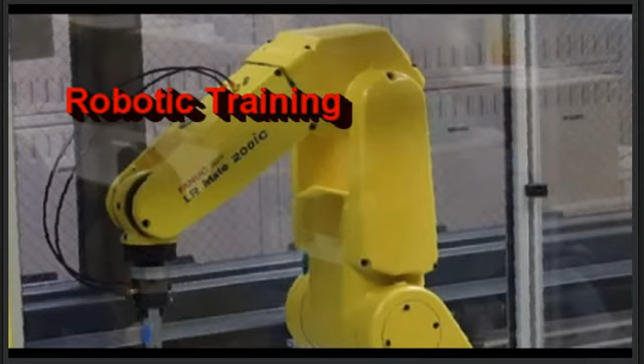What our units look like. You can see that we've got an arm, so we have a robotic arm. We have the controller back behind here, and then we have the teach pendant. Those are the three main parts of this robot. So

let's go on. Here's the teach pendant, and there's a number of keys on here. You can see that I've got an on-off switch over here. We've got an E-stop. Of course, that's going to kill everything if I hit it. So if you think you're running your program or whatever, and it looks like it's going to crash, and you're starting to get a little bit nervous, you can always just hit the E-stop and it'll kill it as well.

And then you've got a number of push buttons down here. The big ones that we're going to use most often would probably be the shift key, the reset, well, just the one that got listed, the coordinate key, our jog keys, and if we play with the speed, we can use these two as well to adjust our speed. Those are the ones that we're going to use most often. And I will give you the opportunity in lab today to even try that if you want.

Okay. Our robots are 6-axis robots, meaning that they actually have 6 different joints. You see the joint 1 is right down here by the base of it. Be right here, 2, 3, 4, 5, and then 6 is out here. Okay.

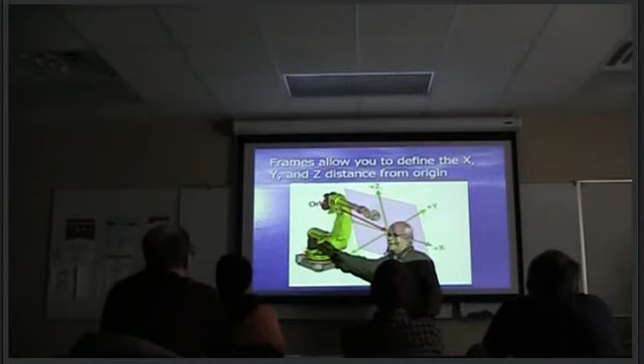Okay, so here, you can see that we got our X, Y, and Z, but notice the origin has changed. It is no longer over here on the base where we saw it before. It has actually been extended out. Okay, so our X, Y, and Z start at this point. So our frame, which would have been over here before, has now been extended out further.

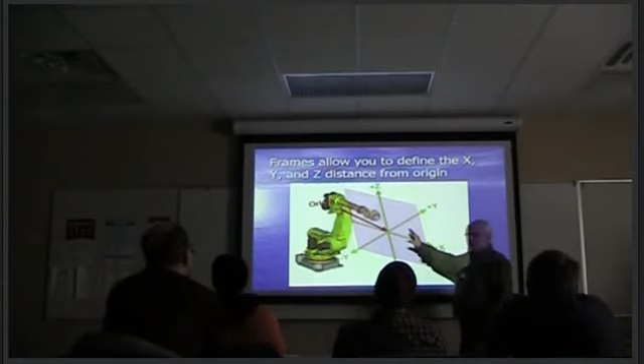You do that by manipulating what your coordinates are. You can actually set the coordinates. So we can say we want to go out so many centimeters out away from the base. That can be our origin. So you're orienting on what you're working with? Yep. More or less.

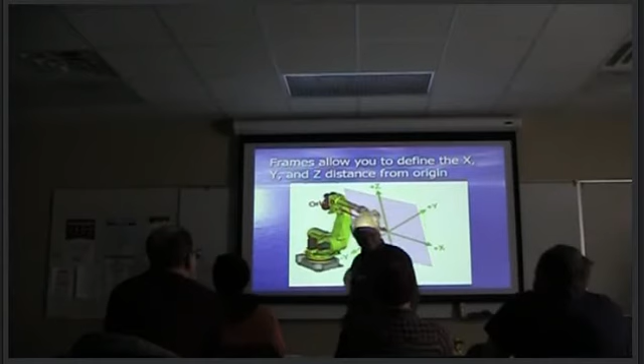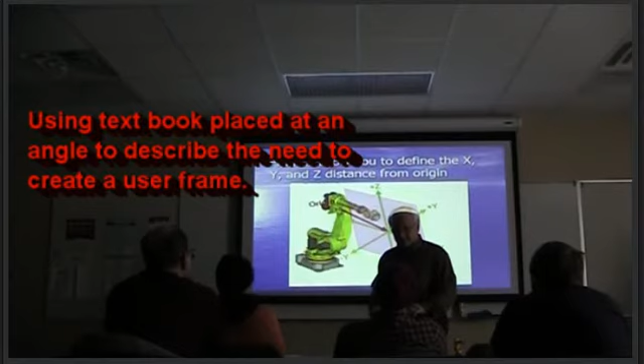Say I was going to build a piece of equipment or set a piece of equipment in place, and I'm using my robot to do some welding. Well, what happens if it's sitting like this? If my robot only knows X, Y, and Z, it'd be pretty hard to weld on this at an angle. So we actually go to what's called a user frame, and we would set this up as our origin. We'd have our X, Y, and Z figured out for that. So that's what a frame is.

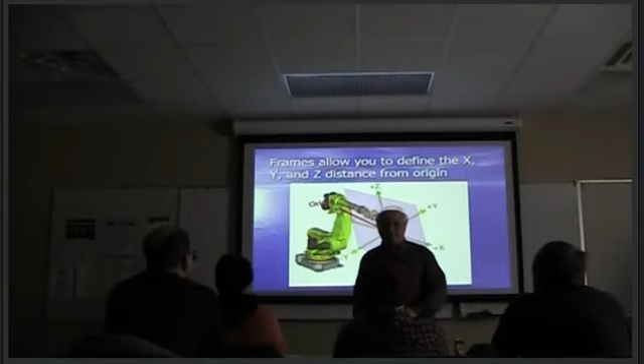And they actually have different ones that they use. They've got world frame, that's the default one. That's the one that uses the base or the center of the robotic arm as their origin point. And then you've got tool frames, and again, that's going to determine where your tool is actually going to be used. Like when I tip the book up, we would use that for our user frame origin point. Then you've got user frames.

Remote tool center point, that is if we actually had like a welding rod or something on this. So when we go to tool frame, we're talking about this piece right here, the center of this. If we have something that extends out from that, that'd be your remote tool center point. So if it extends out, we would go off that. So there's a lot of different choices we can use.

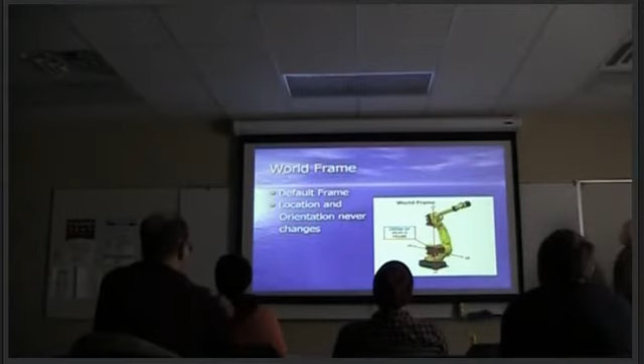And I just mentioned this about the tool frame. If we use that, it's the default of the base plate where we mount our tools on there, on the arm. And if we look at it again, you can see that if I do actually have a tool that extends out past that base plate, then it would be a tool center point that we'd actually be using for origin.

Okay, now, what we're going to do, and actually I brought in one of the teach pendants with me. When we go into the lab, I'm going to actually have you have the opportunity to move the robot a little bit. We use the teach pendant for that. And you look at your X, Y, Z. These are the three major axes. Okay, that's your right-hand rule.

Okay. The orientation or the minor axes are out here, where we have what's called yaw. This is pitch, and then right here at the end of that, roll. So those are your three minor axes. Any questions at all? Does that make sense?

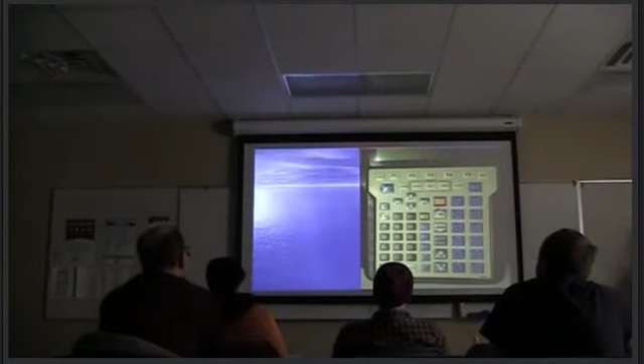Okay, so to open a file, we would actually first select, arrow to it, and so on. We'll get back to that, I think. I'll go through this a little bit with you. Okay. So if you look at that, and I think you can still see it up there, I'm not sure, but if not, I'll bring up our teach pendant here, and you can see that I do have a select button right here. Can you see it on that? Does it still exist on that? Okay. So we still have a select button.

So if you push the select button, you're going to get this window to pop up, or the screen will change to this. And what this does is it lists all the programs that have been stored in the memory of this arm. The one that's highlighted is the one that I created. We use the letters ZZ when we're creating our name for our program. The reason for that is at the end of the semester, it's easy to go in and get rid of the Z's.

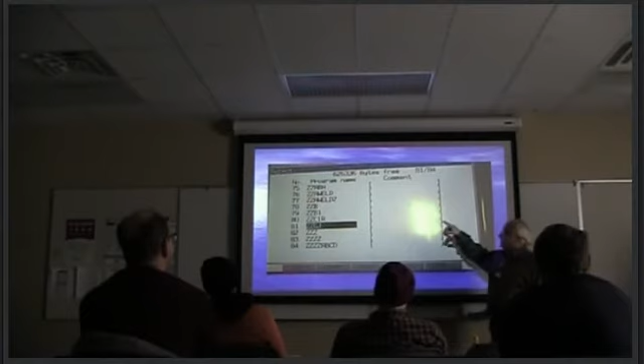So rather than have this thing get so full of programs that nobody can use it anymore, and how do you determine which ones to get rid of? We've already got them tagged as Z, so we know that those are ones we can get rid of. That's just here. You're not going to find that every place you go, obviously, but at least here we know which ones are which. So anyway, you would arrow down or up to whatever one you wanted. You can see that mine just happened to be 81 of 84, right here.

F2 to create, we're going to do this today as well. So we're actually going to go in, we're going to move the robot arm around. I'll show you how to do that, and then we'll actually go and set points inside the work cell so you can see what's going on with that. Okay, you can see here that I've got this picture because you can see my finger pressing F2, which corresponds to create.

So if you go in there and you want to start with a whole new program, in other words, you don't want to use somebody else's, or you've got one in there already, then you can enter that one. But in this case, you want to create a new one, you just push F2 for create.

Okay. And you can see them along the bottom there. These are your actual choices. So when we hit select key, this pops up, and these are the different choices that you can make. And even if you want to go out and delete your program, if you have a program in there to delete.

Yeah. When we do go in there and we do click create, you got to create a name. You got to put that in there. And how we do that is this Alpha Input 1. And even though you can't read it, it says uppercase.

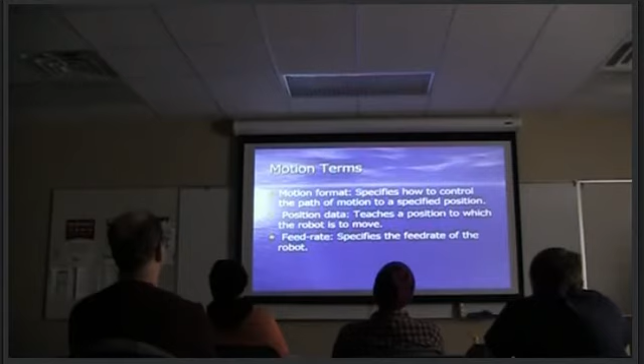And they are like motion format here specifies how to control the path of motion to a specified position. Position data teaches the position to which the robot is to move. Now, this works with the frames. Again, which frame are we using? Do you remember? World. So we will be putting these in the world mode. It also determines the feed rate, how fast we want this thing to move. That's what a motion instruction looks like.

So these are the things that we need. We need to tell it what format. We need to determine the position data. Now, they've got two choices. You could either move to a point and then set that point. That's what we're going to do. Or you could have a position register. In other words, a register that you created where you already got a position picked out. You just call it that register. And then you go to that.

Yes? Which motion command are you using? Motion commands are joint, linear, and circular. That's what the JLC stands for. No, which one will we be using? Which one will we be using? Yeah. We'll just use the joint. It moves faster than linear, and circular requires 3 points for each part of an arc. You gotta have the start, you gotta have the top of the arc, and then where you want to go to.

Okay, so the next one over is your feed rate. We will determine how fast we want to go at it. It's at a percentage, so 50%, 100%, whatever we decide there. Then it talks about position data. You can see that it's got X, Y, Z, W, P, R. What are all those? Are the points, or the location of your different joints in the robot.

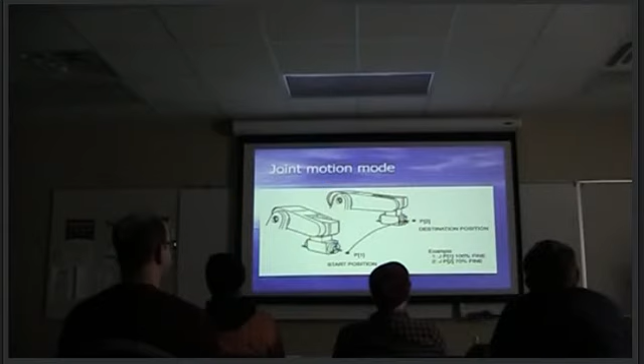We'll talk about fine and continuous, so kind of keep in mind that I did say fine at this point. Fine means it's going to go from one point to the next point without skipping or just going around the point. When we go to continuous, that does change. Okay. Linear motion. Speed must be chosen from millimeters per second, centimeters per minute, and inches per minute. In other words, we have to choose the speed.

Attitude of the tool being moved is controlled by the attitude at a start point and the attitude at a target point. In other words, it's going to keep it tight. Think of welding. If I'm welding something, I don't want the point going up and down. I want to keep it right where I want it as it moves. With the other one, it wouldn't do that. Circular is going to kind of go around and the point will go up and come back down slightly as it does that. So that's what they're talking about there.

There's different speeds. Is that the same one? I gotta get it twice, I guess.

That's slower than the joint mode. It has to take a little more time to get where it needs to go. Probably has to manipulate all three joints or more while it's doing it. Well, it could be manipulating all 6. Yeah.

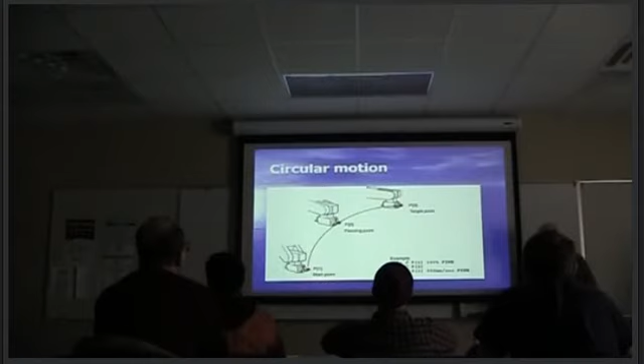Okay, remember I mentioned fine? Here's where fine and continuous come into play. If it's a fine position path, robots stop at a point before moving to the next point. And you can see here the instruction. If it's continuous, it doesn't necessarily stop exactly at the point. It's going to get close to it and then go to the next point.

In other words, say you want to outline this book. So this is point 1, this is point 2, 3, 4, and we put a 5 in there just to get back where it's supposed to be. As our robot comes here and it gets closer, depending on what I want that continuous to be, it could skip all the points as it goes around until its final point. It's going to come close to it, but it isn't necessarily going to come here and stop at it. And again, that speeds up the process if you don't need it to be exact. So that's what they're talking about, continuous.

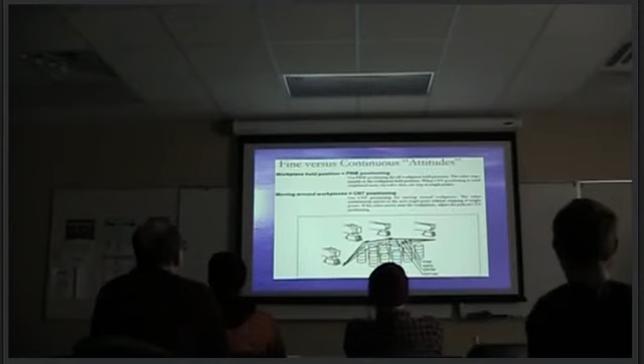Right. So 100 is your largest discrepancy, whereas 0 would be your closest to fine. Here they show another example of it. You can see that they're going from point 1 to point 3, and you can see how fine is right to the point, and of course the other ones vary further out as you increase that number.

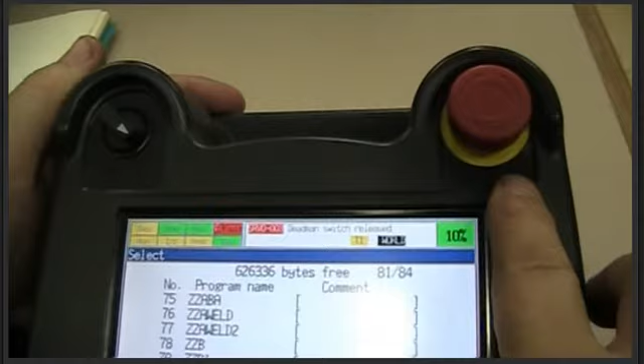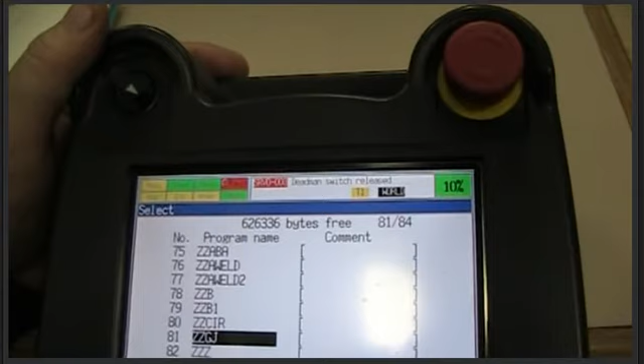Okay, here is the teach pendant screen. If you look up here, you can see that I've got the selector switch in the on position. I also have my e-stop out. You will notice that it says fault up here. At this point, it doesn't matter during this process of creating the points. Once I try to move the robot, obviously I have to get rid of the faults.

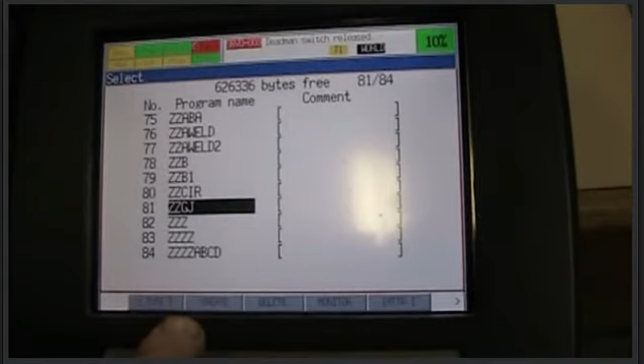But the first thing I want you to see is right here, that gray bar I was talking about, and it is split into 5 choices, and the one we are concerned with is the one that says create. They correspond to the F keys that are located down here. So create corresponds to F2, so I'm going to push that.

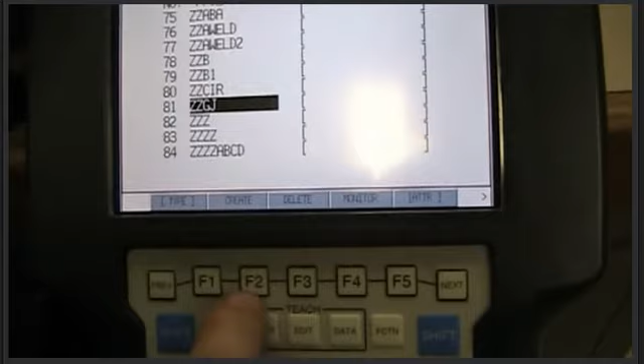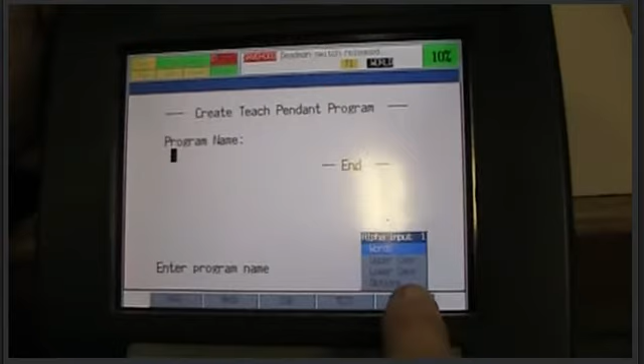Okay, here is your create teach pendant program, and now it's waiting for me to create the program name. If you look at this little window that popped up over here, this is what I was talking about as far as the alpha input, and you can see the first one that's highlighted says words.

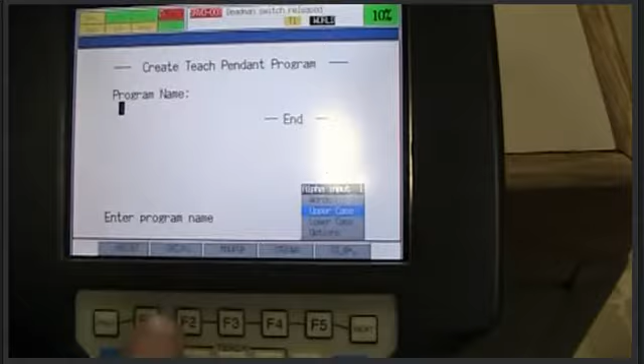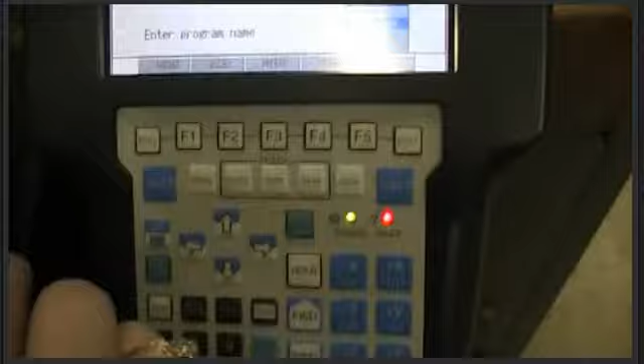I'm going to arrow down, so I'm going to go down to my screen here, arrow down, and you can see now it's switched to uppercase. And now if you look at that gray bar, you can see that the corresponding F keys correspond to a group of letters. Again, for here at our school, we always start with Z's.

So there's the first Z, you arrow over. And I'm going to put another one in there, arrow over. I'm going to put a third one in there just so that it isn't going to be confused with another program that I've got in there. And now I'm going to put my initials in there.

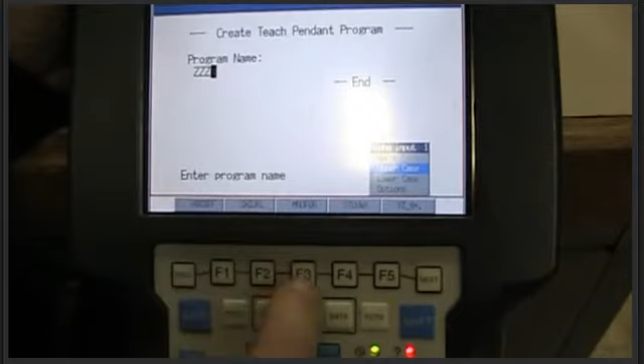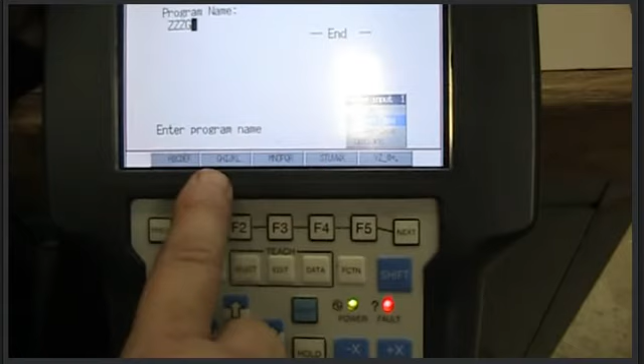My first letter would be a G. There's my G. And again, you have to arrow over each time. Otherwise, it doesn't move. You'd just be writing over the top of what you've already created. And then my last initial starts with a J. So I've got my J in there. So now I've got triple Z, G, J. And I'm going to push the Enter key.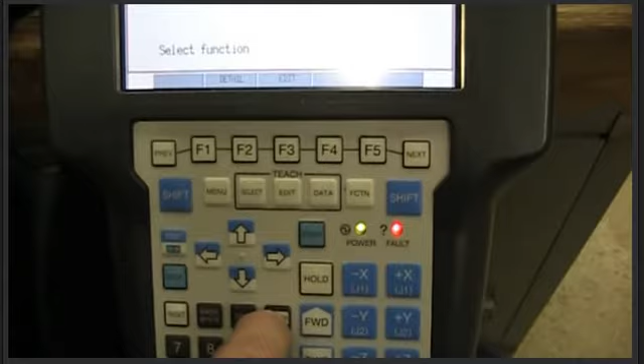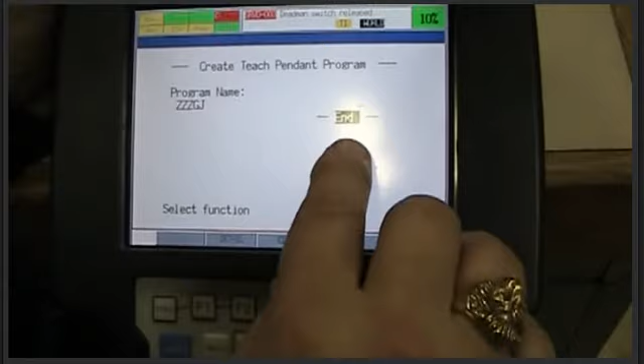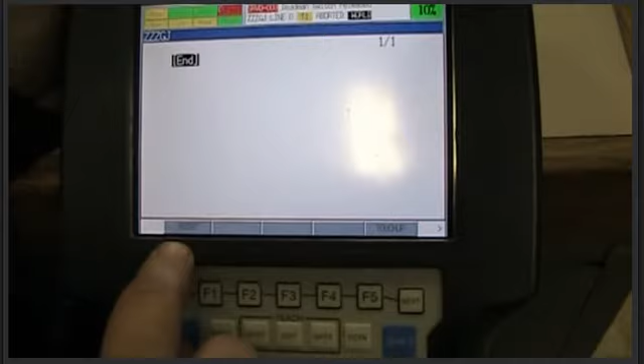Okay, if you can see that it changed, that window disappeared. It says create teach pendant program. There's the program name I created. Now it says that the end is highlighted, and this is where you hit enter. Okay, you can see that it now says end here, and it says point. The other one that I couldn't remember before just says touch up. We're only concerned with the point right now. So I'm going to push F1 to correspond with point.

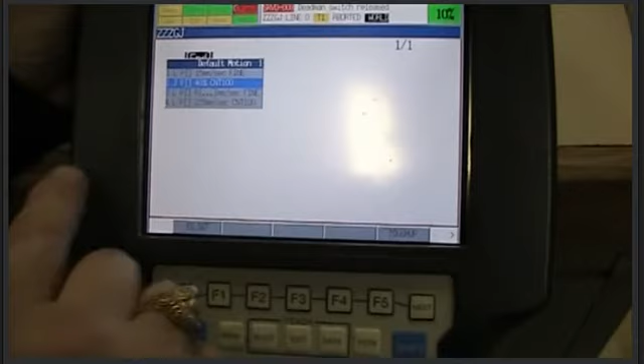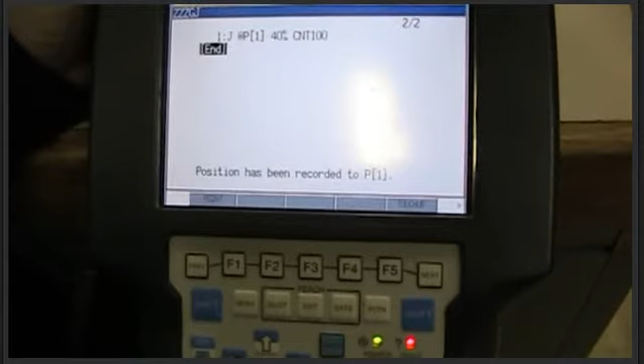And here's the default motion window I said that pops up. And you can see I've already got the second one highlighted. And that's where I wrote down JP with brackets 40% and continuous 100. So I'm going to hit enter. Okay, so that would be my first point. And that would be where you would have your robot positioned.

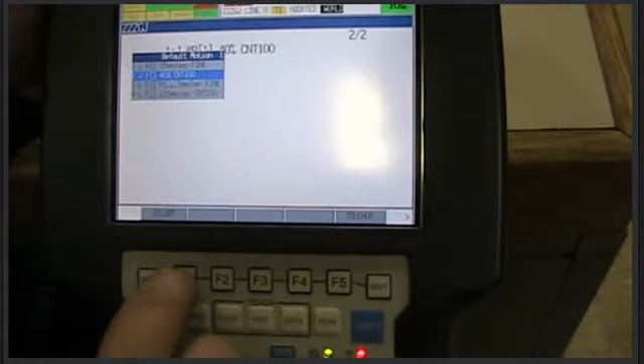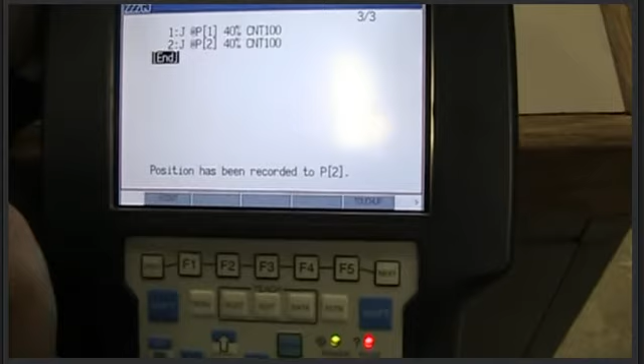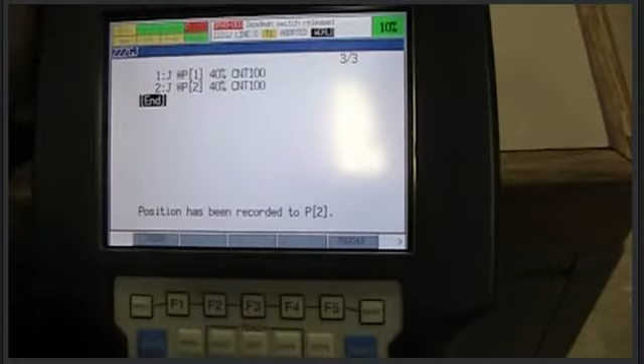So now, each time I move the robot to a new position, I hit point. Again, the window pops up. I just hit enter. And I will put in all 4 of my points that way, but I have to obviously move the robot to different positions as I do that. So at this point, that's what you're looking at. And when I'm all done, I can go back and I can change these if I need to. Okay? So now I'm going to pause the camera, and we're going to go to the robot, and I'm going to run the program.

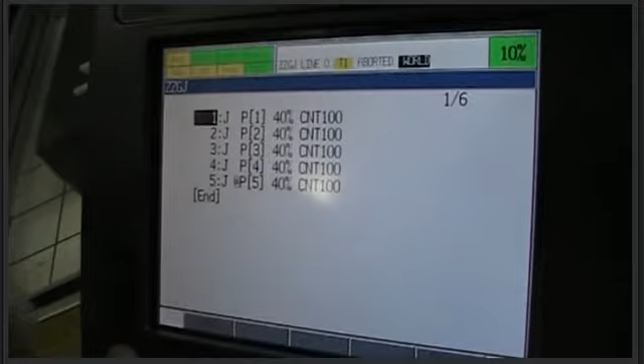Okay, so here I've placed all the points in. Now you'll notice that it's a gray foam block in the window that the robot's actually going to go from corner to corner on. But if you look here at my screen, I actually have 5 points that I've created. So what I did was I completed the last one and brought it back more or less to my first point. Okay, so that's what you're looking at here.

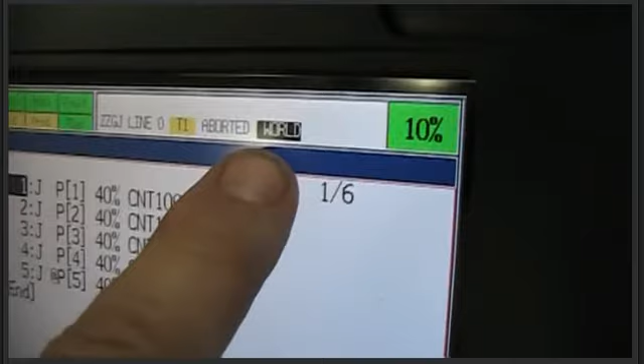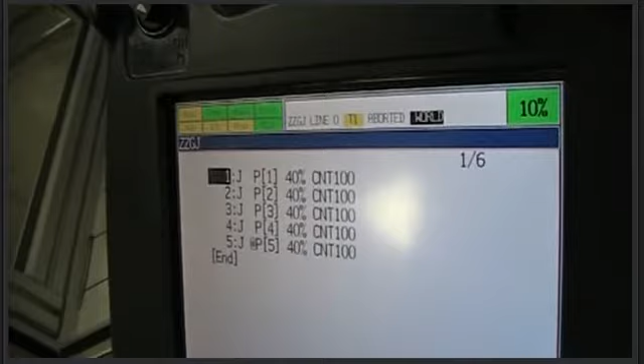Notice that the robot is in world mode. Okay, so X, Y, and Z. And my faults, I've cleared those now so that I can actually make the robot run. And one of the things we want to do, if you look right up here, you can see where it says step and it's in green. I'm actually going to push the step button here, and notice that I got 2 little red bars and a couple of arrows there now.

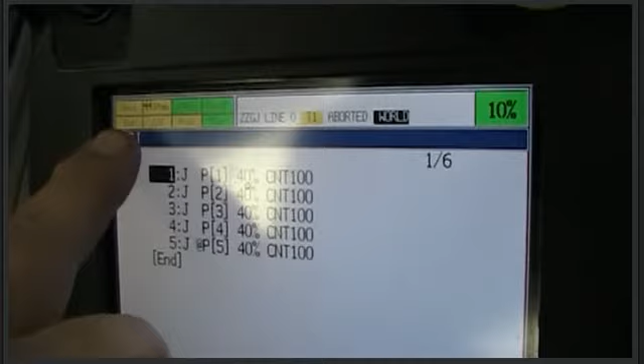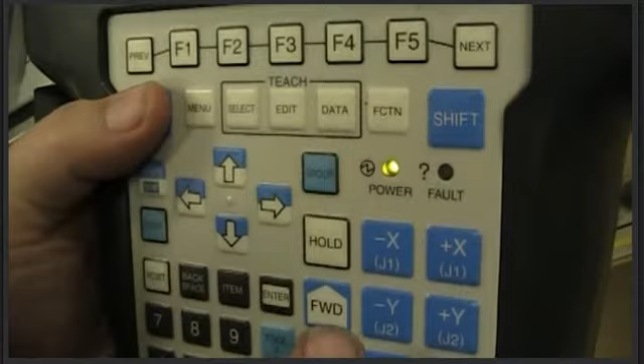What that does is it allows me to move the robot 1 point at a time, and we're going to try that. So I'm going to push the shift button and the forward button, and watch the robot now. Okay, so right now that's point 1. It's going to be moving to point 2, and I just sped it up a little bit. Okay, so there it's moved. I'm going to go to the next point that I've programmed. The next one.

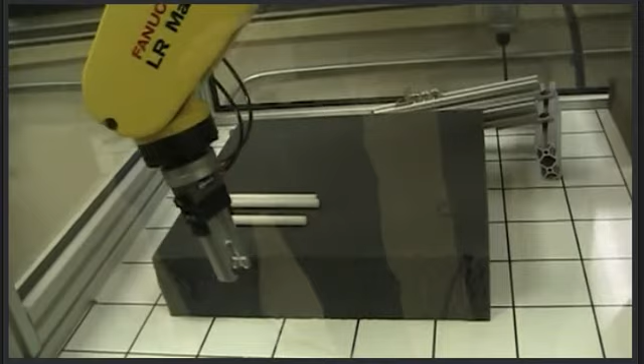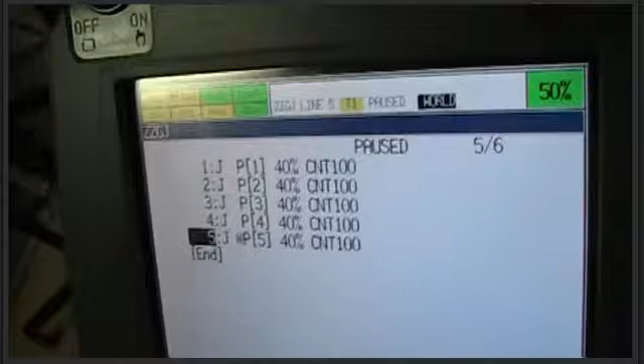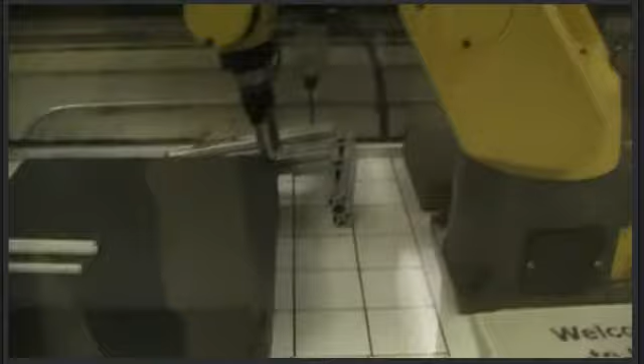Okay, and that would have been point 4, and now we're going to go back more or less to our starting position, so this is point 5. Okay, so now if you go back to the screen where I've got yellow and I've got the 2 red bars and arrows, I'm going to push step again. You can see that it's now switched back to green up here. And now if you watch the robot, when I push the forward button, it should run the whole program. So it's going to go through each one of the points that I've programmed.

So you can see that, again, every time I push forward, it's going to run through all the points that I've actually programmed. All you have to do is hold the shift key. If at any time you think something is going wrong or it looks like you're going to crash into something, you can either take your thumb off the shift button or release or squeeze the dead man switch.

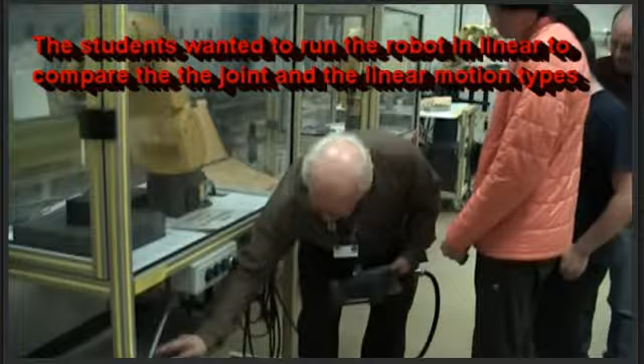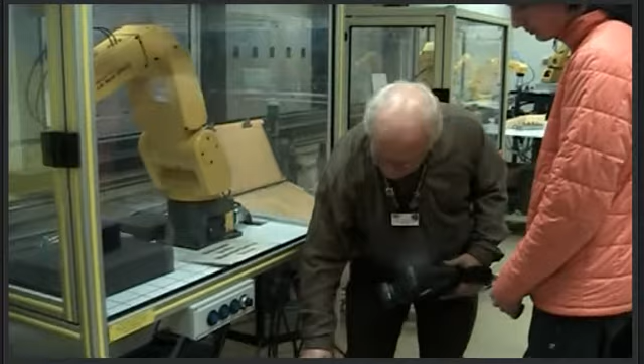So the first thing you want to do when you get over here is make sure our controller is on and doing what we need it to. So it has to be on. Our key switch has to be in T or teach mode. We don't have to worry about the green button, but we do want to reset our E-stop. When we get done with it, we'll hit the E-stop and shut it down. Next thing over here, we have an E-stop here that we have to reset, and we also turn the teach pendant on.

Okay. Now, what mode is this in? When you look right here, see where it says tool? We want to change that. So how we change that is we push the coordinate key. See, it just changed. Now it says user, joint, jog frame, and now we're on world. Remember, that's where we want to be. Okay, so that's using the robot as our origin.

Next thing is we have a fault. Well, I'm not holding this dead man switch, so I'm going to hold the dead man switch now. And right here it says reset. I push that, you see it disappeared there, and it disappeared there. See all that? You're the one that wants to run it, so you're paying attention? Okay, so I got rid of the fault.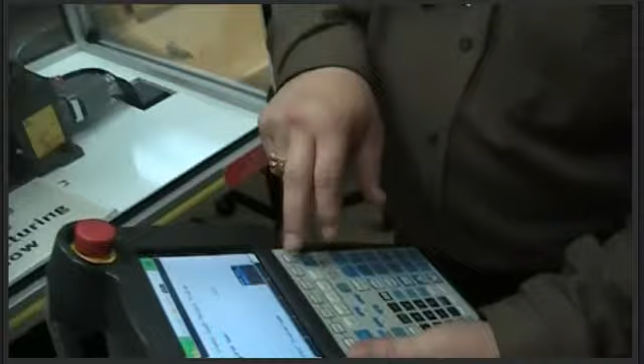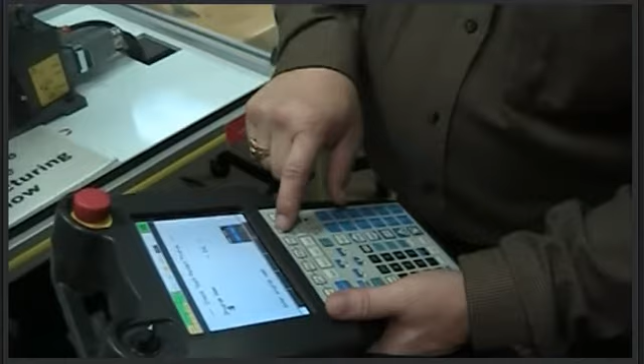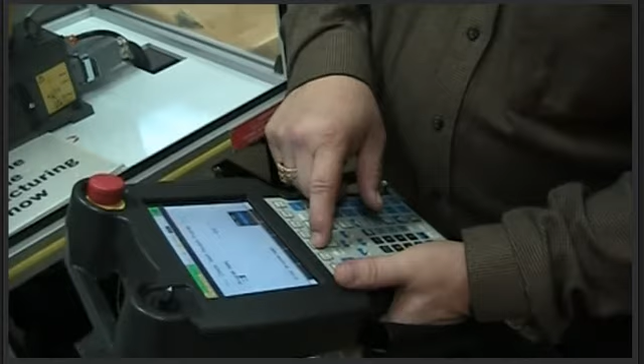And let's see, we want Z. Okay. And again, if I don't arrow over, I'm going to write right over the Z that I had. Z. And let's see. Ian starts with an I, doesn't it? Yeah. Okay. And what's your last initial? E. Say it again? E. E? Okay, so that's the first one. We just keep toggling through there.

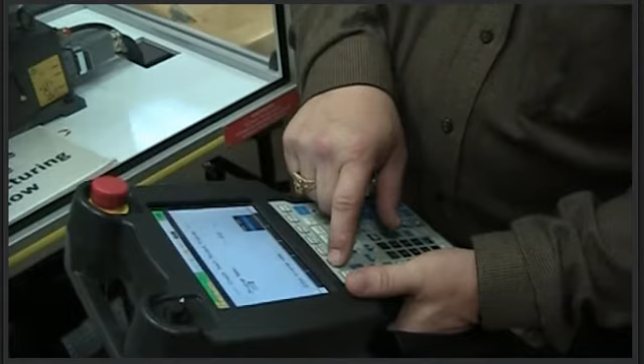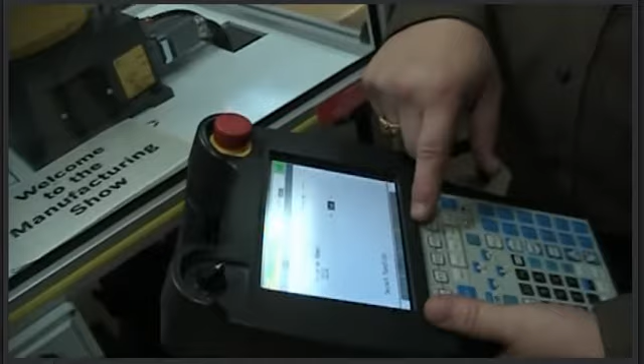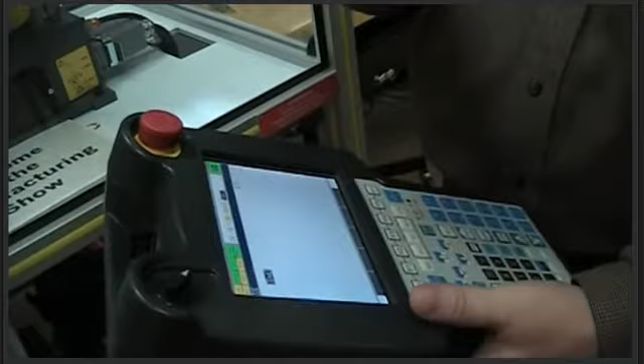Okay. So once you get all that, now we're going to hit enter. Notice that's where you had detail and edit before and you couldn't figure out what we're doing. You actually have created the program name now, and you have to hit enter again to get us to the point. That was the only part that you had kind of caught up on. Okay, you want to try it? Yeah. Okay, so now he's got the dead man switch.

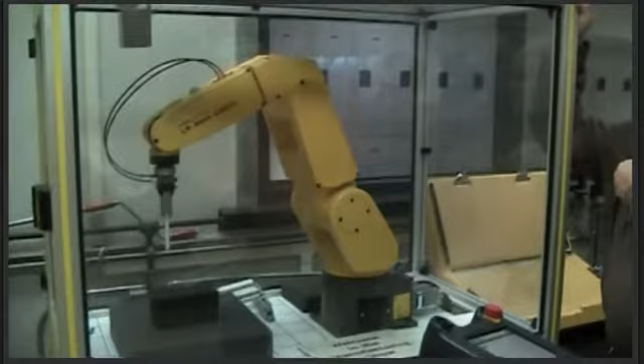I can release it. Now what we're going to do is we have to move the robot. So hold the shift. Now, again, we're in world mode, so X plus is going to take you this way. X minus is going to pull it back. And why don't you put the points for the gray square around it? In other words, go to that far corner over there and make that your first point. Let's speed it up a bit. You're only at 10%.

Now, if you didn't see what I was doing, the percentage keys over here are for speed, I sped it up. He was moving very, very slowly at 10%. It'll take us another 2 hours to do this. So he's just moving it into position. Once he's got it there, bring it right down to the foam rubber.

Okay. And that looks good. Now what we want to do is push F1. Okay. Now it put in an instruction. Now we're probably going to want to go in and edit, but right now we'll just leave it. Now move it to our second point, which would be that other corner there.

Okay, so how are we going to, yep, there we go. Okay, and just hit point. Each time you hit point, it's going to record whatever position it's in. And that's what he's creating right up here.

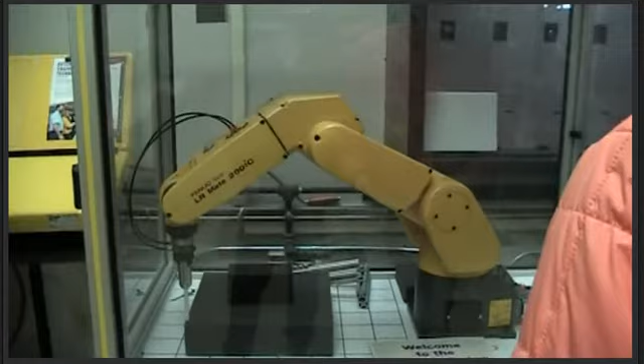And if you look at that, you can see that the reason it's coming up the way it is with the speeds and everything else is because these are being recorded in linear mode. If we didn't record it in linear mode, if we recorded it in joint mode, you wouldn't see it. It would give you a different list of instructions. 5? Okay, so he's got all 5 in there.

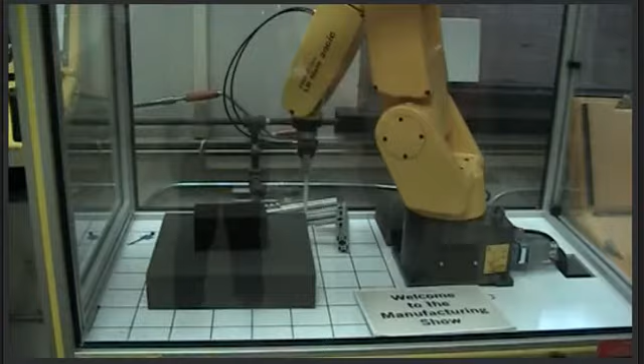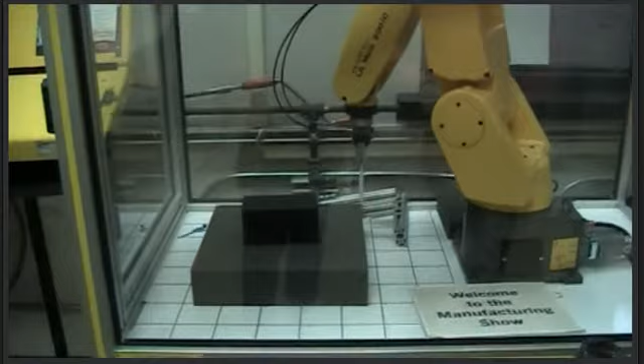And what we're going to do is now that he's got it, we want to see this thing run, right? Okay, but we don't trust you. Or I should say we don't trust ourselves when we do this. So what we want to do is go ahead and do it one step at a time. Because if it's going to crash, we want to be able to stop it before it goes any crazier. So you're going to push that button there that says step.

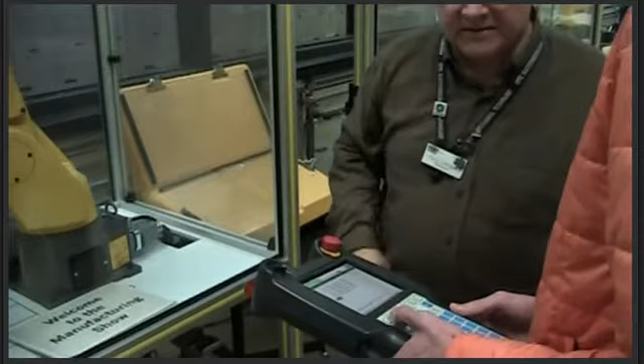And notice it changed right up here. It was green before. Now it's yellow with 2 little red lines and a couple arrows on it. What that means is each time he now pushes the shift and the forward button together, it'll move just one step at a time or go to one point at a time.

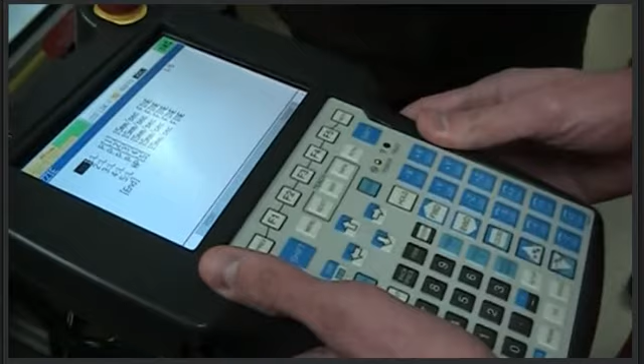So hold the shift and you can, or we can just start where you're at. Either way. He asked, do I want to bring it back up here? Because right now we're on the 5th point. Okay, so he could arrow up and bring us right up to the top, or if he were to just hit the shift and the forward, it would go to the first point, and then the second point, and so on. Okay, so go ahead and hold shift and push forward.

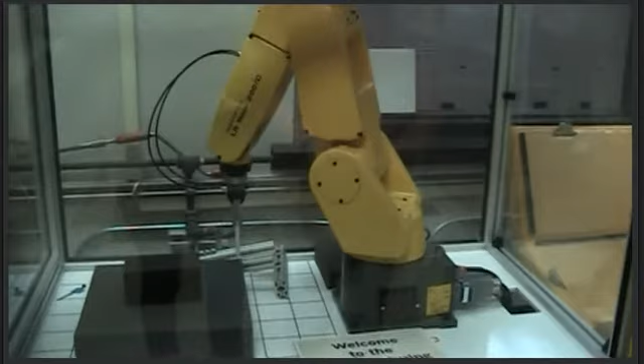And we might want to speed it up. 15 millimeters per second, it will be here forever. See, it's not very fast at all. Does it give me any more speed? No, it doesn't give me any more speed. Kind of slow. And I can show you how to change that as well. You can see it's going in a nice straight line because of the linear mode.

Which is good because there's a box there. Pardon? Which is good because there's a box there. Yeah, if we were actually in joint mode, I don't think it would arc enough to hit that, but it could be a possibility, especially if it's closer to an edge. Take it through the rest of it.

So what are those black tubes on the arm of the robot? Are those pneumatic tubes or something? Yeah, those are pneumatic tubes, and those jaws are pneumatically operated to open and close. Okay. Is there a setting to open and close them on this? Yes, you can set it up for that. So the pneumatics would be used for tool operations then? It definitely can be, yes, depending on what you need it to do.

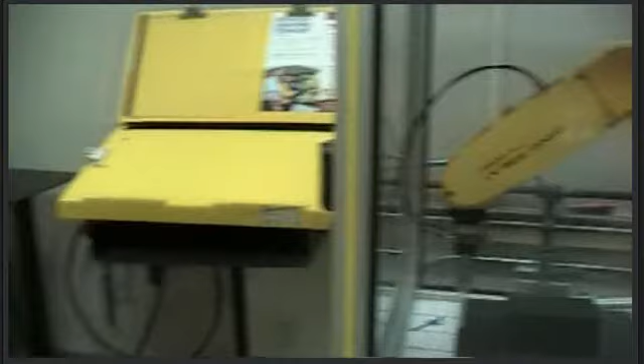If you look at the robot to your left, you can see that they're using a vacuum with those little suction cups. That's what they grab parts with. So again, they're using pneumatics to run that vacuum.

And then he's going one step at a time. Obviously, this is going to take a while. We can make changes to that, but the biggest thing that you want to be aware of in linear mode is that it is going to be a straight line from one point to the next.

Do you have math today or don't you? You don't. We do. You do? Okay, I'm going to cut it short after he brings it